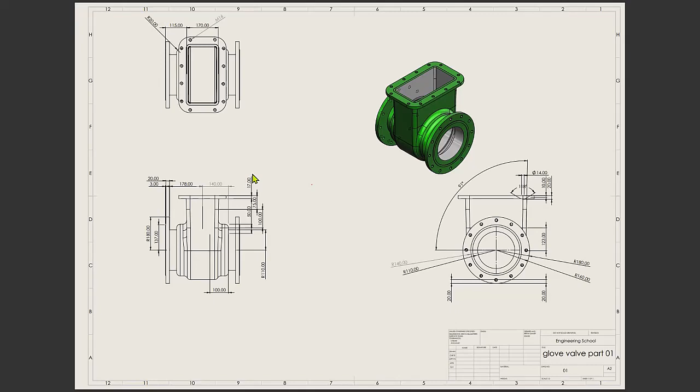This is the 2D drawing that I made. There are many dimensions. If you want to sketch this or make this, you can follow this 2D drawing and practice. If you want to become an expert in SolidWorks, you have to practice a lot. Without practice you cannot grow your experience level or your expert level.

So now see, this is the main model. I think it will be helpful for you. Now I will go to the next drawing.

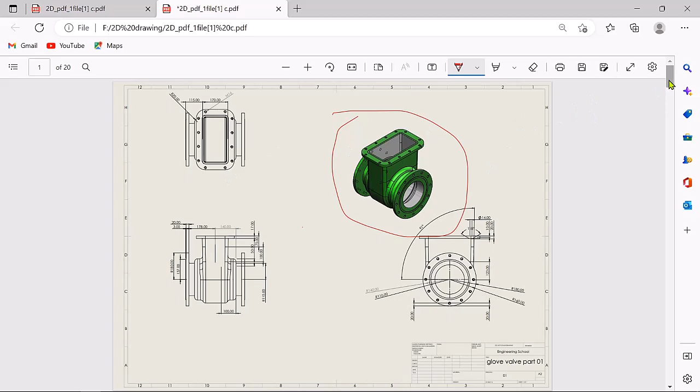Yes, this is the impeller. I already made a video on how to make this, and you can practice with this 2D drawing. Now I am showing the full view of this. You can take a screenshot and practice.

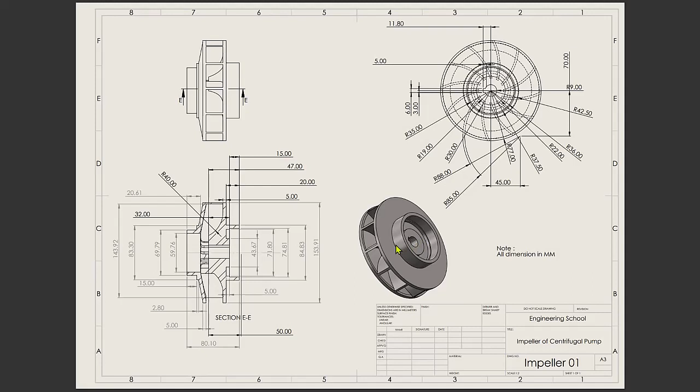Or if you want the PDF file, just contact me by email and I will send it to you. Don't worry, there are many dimensions. First you should understand it properly, then you can make it. I already made a video on how to make this. Now I will go to the next one.

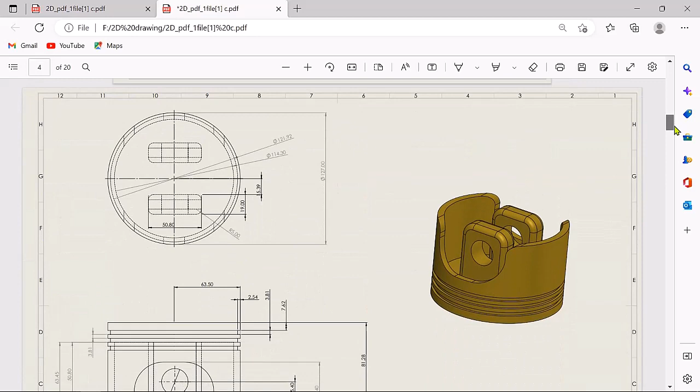Now see, this is the piston head. I made a video about how to make this piston head, so I am showing it and you can take a screenshot. This is the isometric view, and this is the 2D drawing with front view and top view. I think it will be helpful for you. Now I'll go to the next drawing.

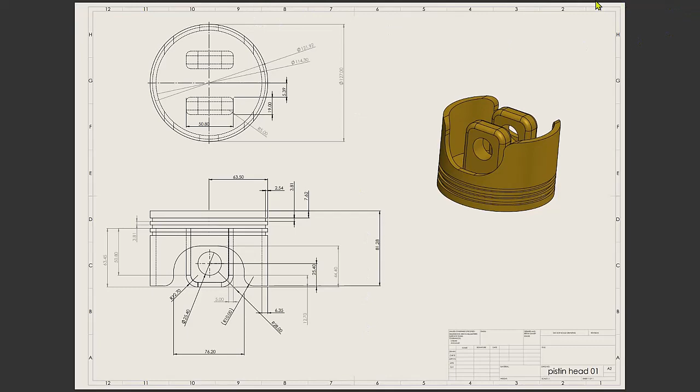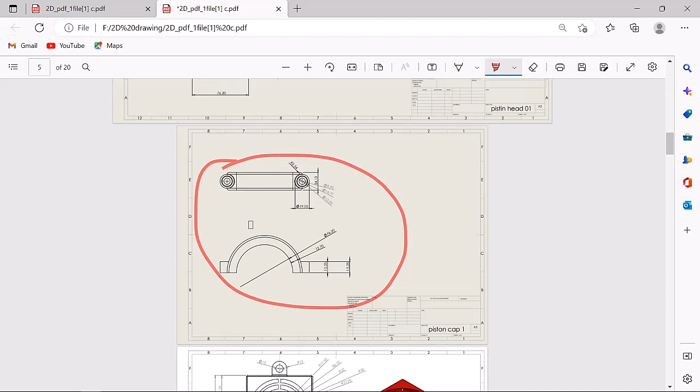This is the piston cap. I already made the full piston assembly; you can check my playlist for how to make this. This is the cap, and this is the front view and top view. You can practice by following along with this.

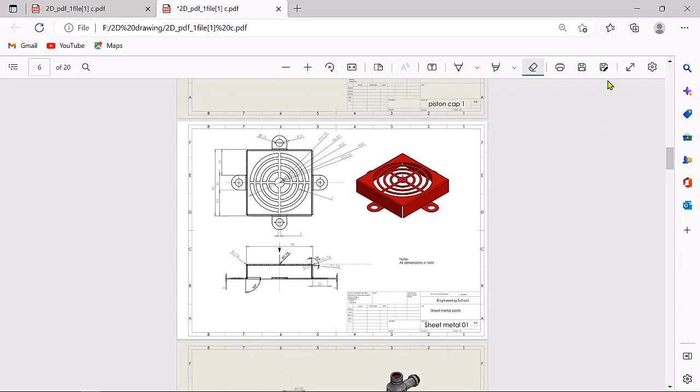And the next tutorial is this sheet metal tutorial, and I am showing the full view. Now see, this is the full view. Let me explain this. Be careful about these dimensions, and you can take a screenshot from this.

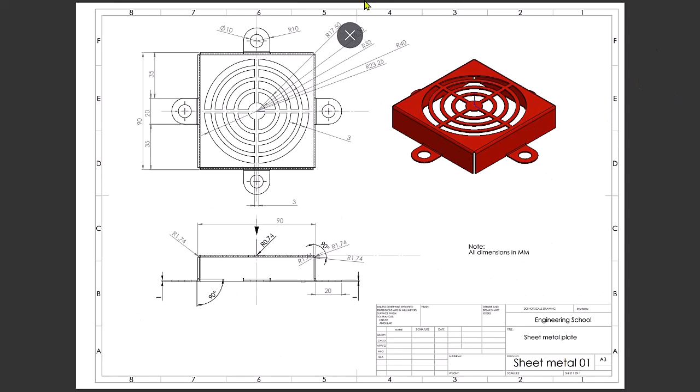Now I will go to the next PDF. Now see, this is the water tap. I made it with a cross section. You can see the dimensions here. I already made a video on how to make this 3D model. You can check my description or my channel playlist, find it, and practice with this 2D drawing.

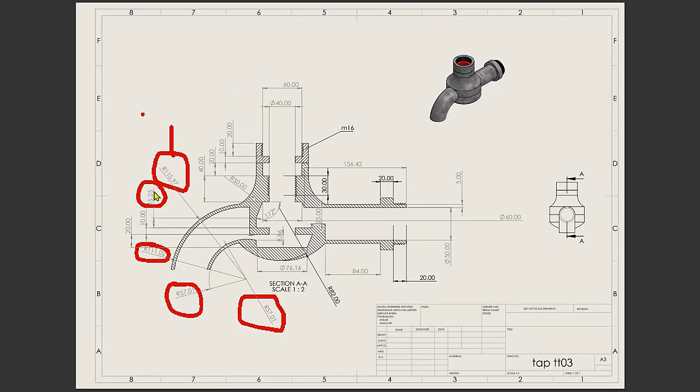Now I'll go to the next one. Now see, this is the table vice base. It is a more complicated tutorial, so if you want to practice with this, you can practice the top view, front view, and right side view. It will be more helpful for beginners. You can take a screenshot. If you need the PDF file, just knock me in the comments and I will send it to you.

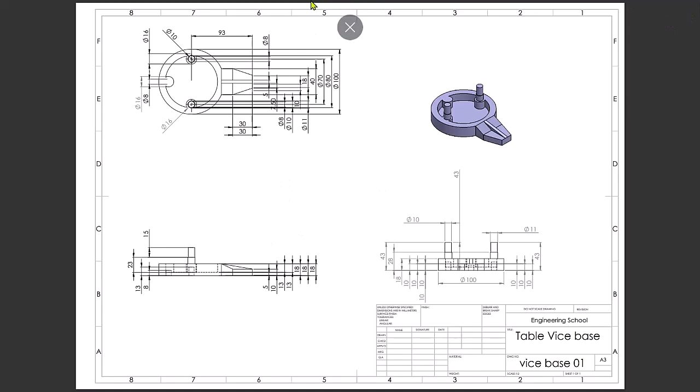There are many 2D drawings here. Just take a screenshot of this and you can practice with it.

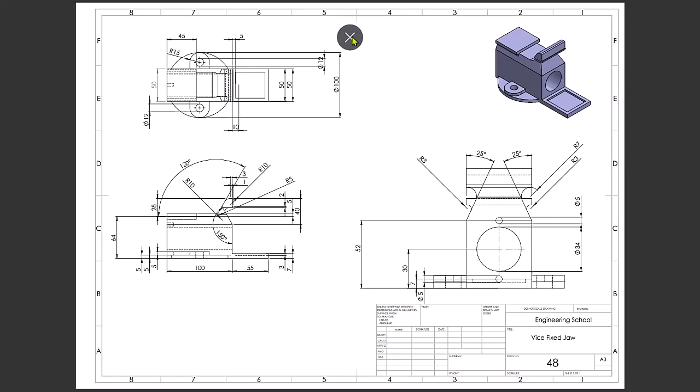Now go to the next one. It is more helpful for beginners. You can take the screenshot and practice with it.

Actually, today I am sharing these 2D drawings because many viewers were saying that they need 2D drawings. I think it will be helpful for beginners; that's why I am sharing it. Please take a screenshot. Next.

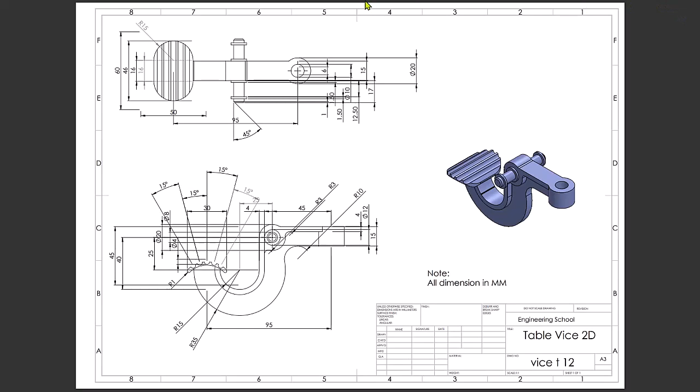Now see, this is the next tutorial. I already made a tutorial about this. If you want to practice, you can practice with me using the 2D drawing. Please take a screenshot.

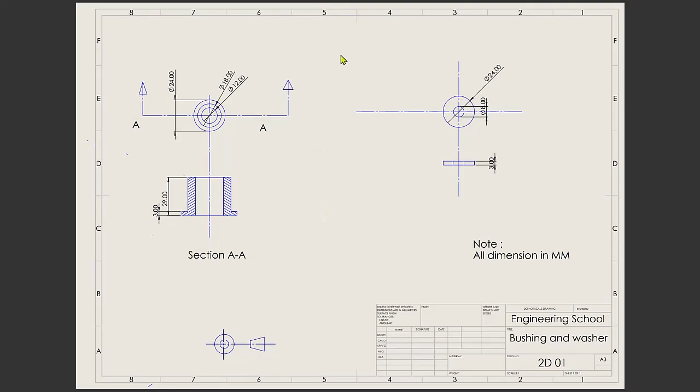Now go to this next tutorial. This is another 2D drawing for beginners. You can practice with this, and please take a screenshot for your help.

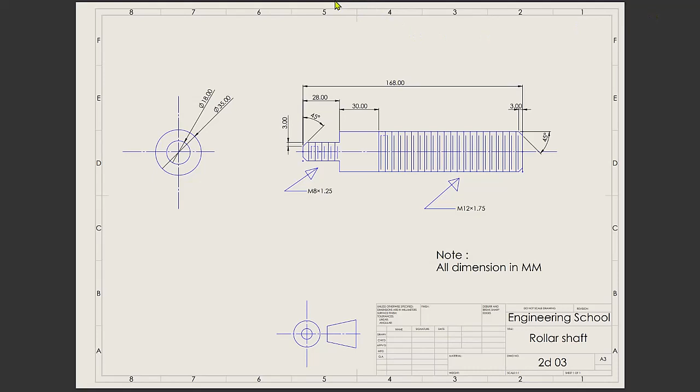Now go to the next tutorial, or next 2D drawing. Please take a screenshot and practice.

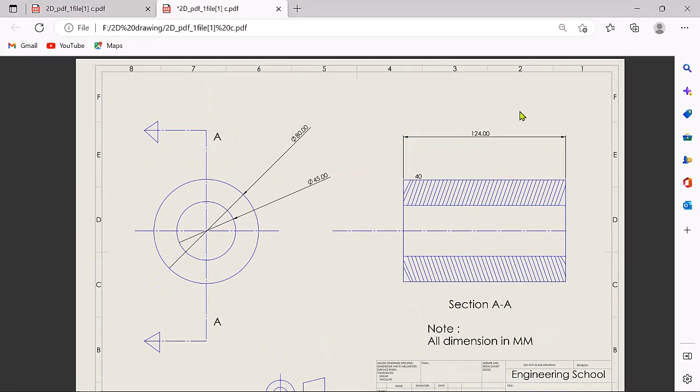Now go to the next tutorial, or next 2D drawing. Please take a screenshot and practice with this 2D drawing. It will be helpful for beginners.

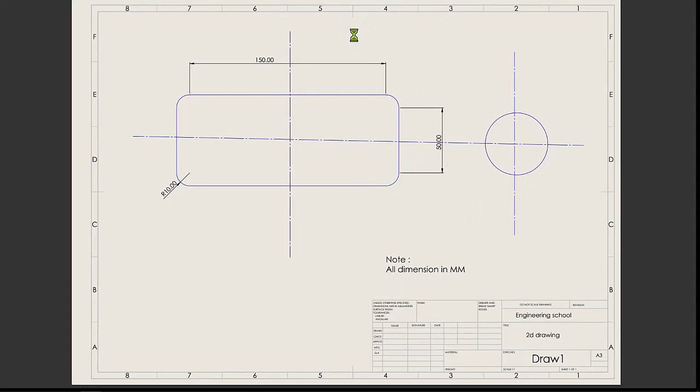I already made a video on how to make this. Please take a screenshot and practice. If you want to become an expert, you have to practice a lot. There is no option without practice. Please practice, practice, and I am always here with you for help.

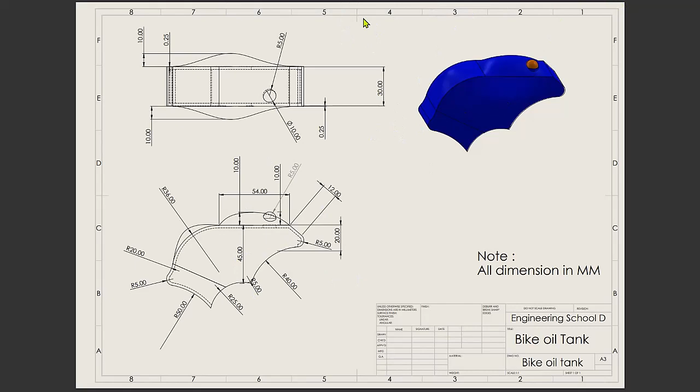Now go to another one. Wow, it is a fantastic tutorial. If you want to practice with me using the 2D drawing, you can practice. I already made this video on how to make this. If you want to practice, please collect a screenshot and practice.

Actually today I am just showing these 2D drawings. If you want to collect your 2D drawing, you can collect it by screenshot. Go to another drawing.

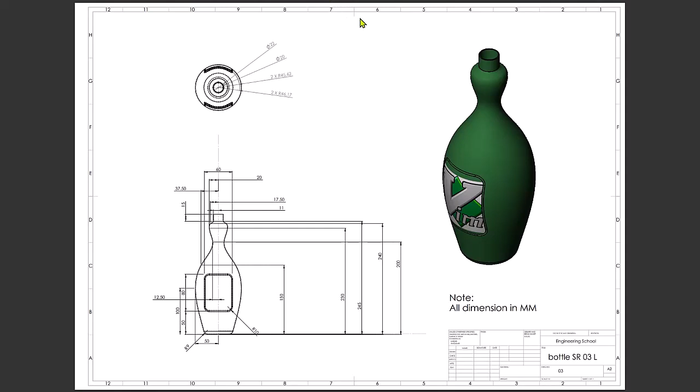Just go to this next one. Now see, I also made a 3D model for this. You can practice with this 2D drawing.

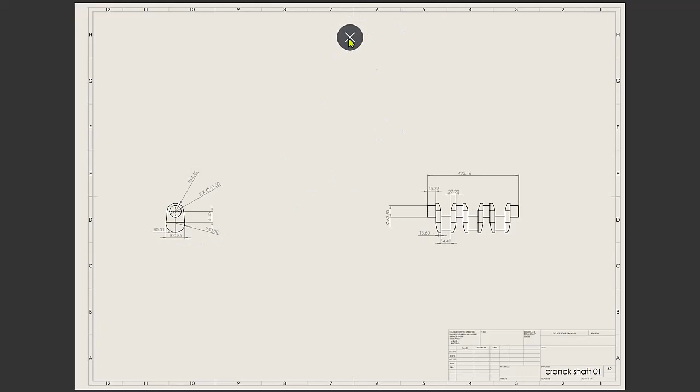Or another one. Now see, you can practice with this. There are many dimensions. You can practice and learn with this 2D drawing and 3D model.

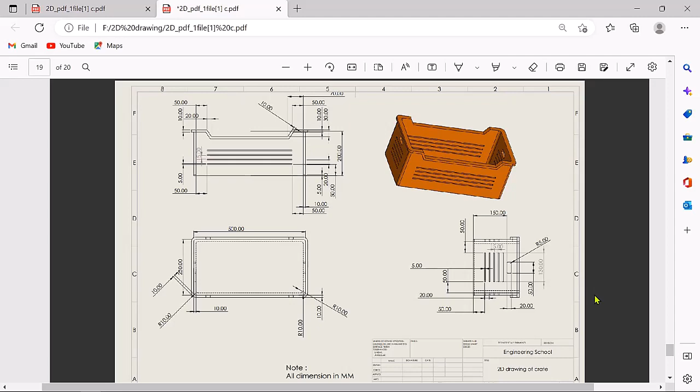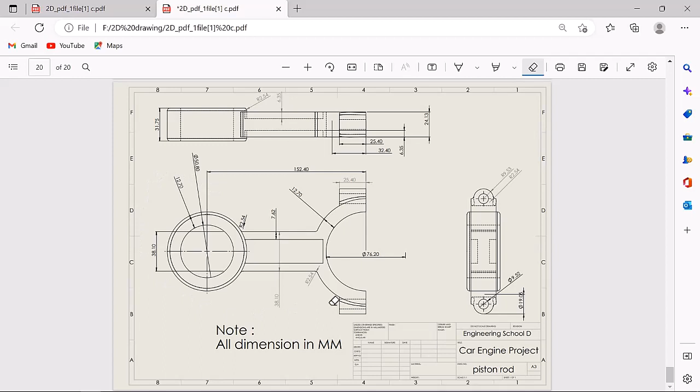This is the last one. You can practice with this. This is the piston rod. There are many dimensions. If you don't understand, you can message me about this.

All of our dimensions are in millimeters. All dimensions are in millimeters.